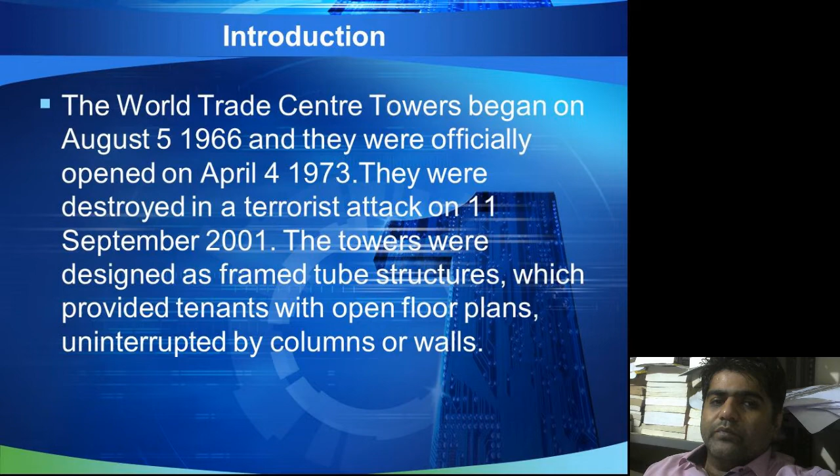The towers were designed as frame tube structures which provided tenants with open floor plans uninterrupted by columns or walls. This was accomplished using numerous close-spaced perimeter columns to provide much of the strength of the structures, along with gravity load shared with core columns. Above the seventh floor, there were 59 perimeter columns along each face of the building, and there were 47 heavier columns in the core.

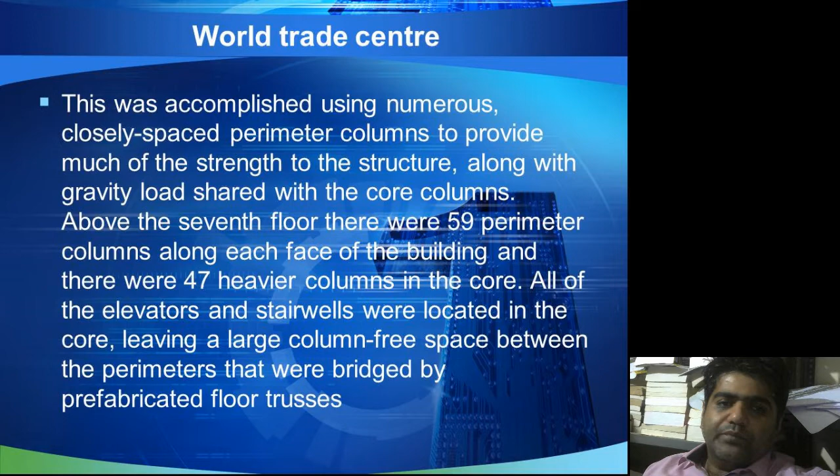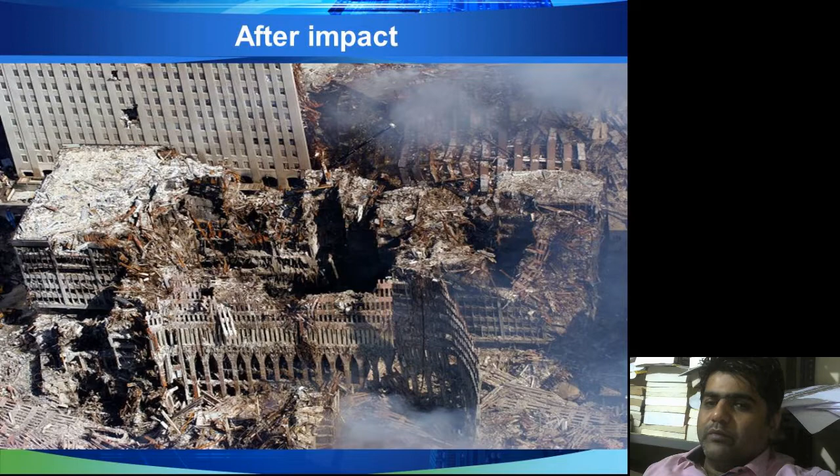I was wondering, so I researched and I found some news articles, and based upon those articles, I'm going to tell you what may be the cause. So, like all modern skyscrapers, WTC towers were designed to survive major fires. Fireproofing was also added after a fire in 1975 that spread to 6 floors before being extinguished.

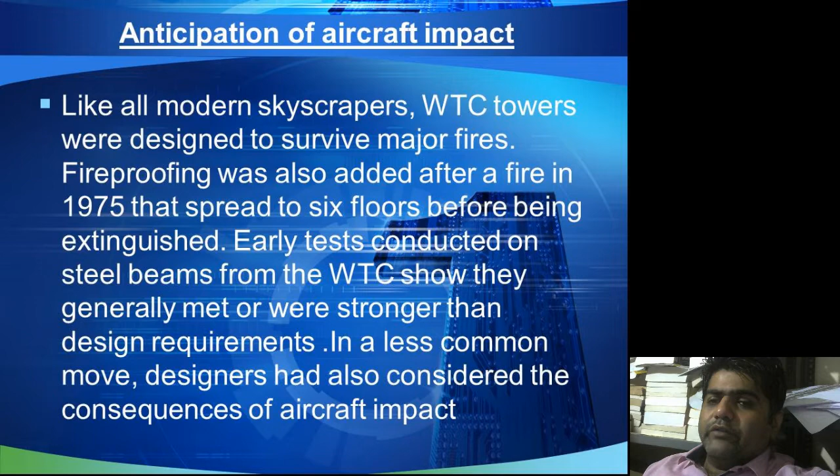Early tests conducted on steel beams from WTC show that they generally met or were stronger than the design requirements. In a less common move, designers had also considered the consequences of aircraft impact. But in 1993, John Skilling, who had been in charge of the structural design of the buildings, said that an aircraft impact would cause a great deal of damage and loss of life, mainly because of the ensuing fires, but the structure would not collapse.

After the 2001 attacks, Leslie Robertson, who had participated in the structural design of the towers, said that the towers had in fact been designed to withstand the impact of the largest airliner of the day, the Boeing 707-320, in the event one was lost in the fog while looking to land. According to Robertson, the aircraft weighed 2.63 lakh pounds with a flight speed of 180 mph, as in approach and landing, which would have been much slower than the actual impact of 9/11.

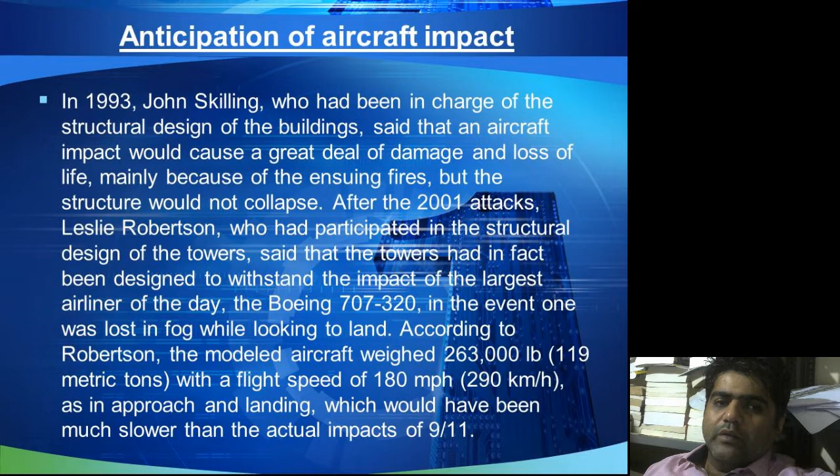The towers of the World Trade Center were designed to withstand the forces caused by the horizontal impact of a large commercial aircraft, but they did collapse. The reason, according to the papers I referred to, was the dynamic consequence of prolonged heating of steel columns to very high temperature. This heating lowered the yield strength of the steel and caused the buckling of columns of the frame structure along the perimeter of the tower and columns of the building core.

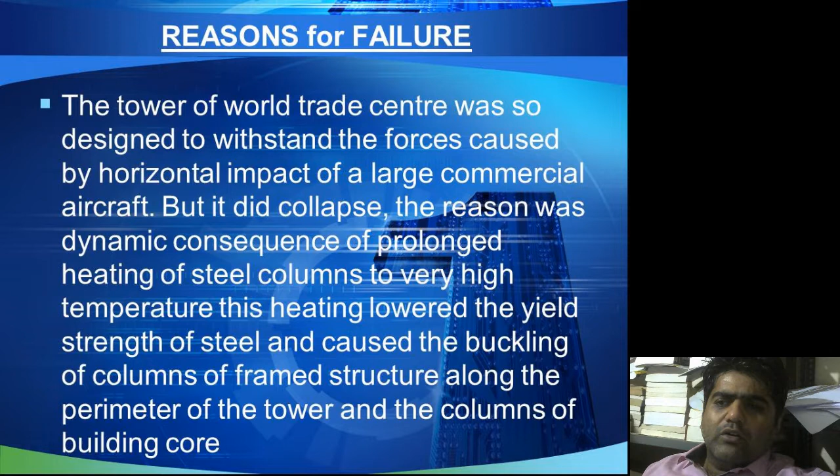So you can see here: 1, 2, 3, 4, 5. So the plane crashed at that one point, and what happened after the collapse? See it here. First when the plane hit, it heated up these columns. Once it heated up, the yield strength lowered.

So this becomes like an impact. So this whole weight is standing on very few columns, that is the inner core, 50 or so columns. Once this collapsed, it's just like a hammer going on that building. So subsequently it all went on collapsing. Maybe this is one of the possible explanations for the collapse.

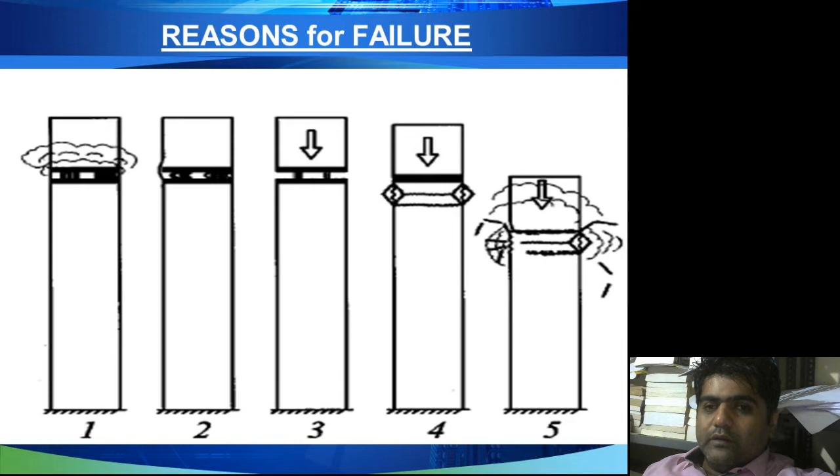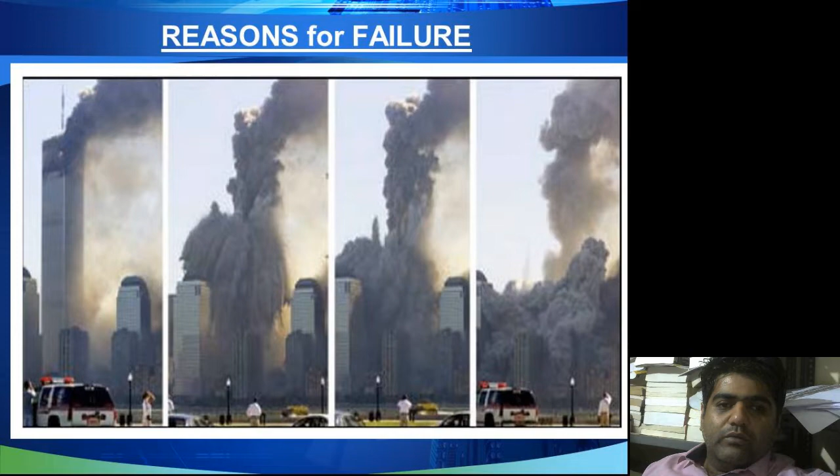So it can be validated based on the existing pictures also. So you can see how it collapsed. So stage one, there was a great fire caused by aircraft fuel spilled into the structure, which caused the steel columns to be exposed to a very high temperature of 800 degrees Celsius. The heating is accelerated by loss of protective thermal insulation due to the initial blast.

At such temperatures, structural steel suffers a decrease of yield strength and suffers a viscoplastic deformation. This leads to the creep buckling of the columns. Once more than half of the peripheral columns get cut due to this heat and this impact.

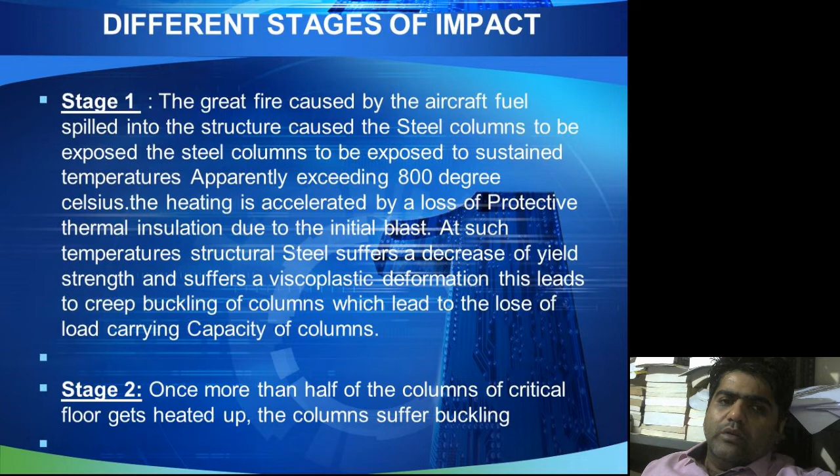The columns start buckling, due to which the weight of the upper part of the structure can no longer be supported, and so the upper part starts falling down on the lower part of the critical floor, gathering speed until it impacts the lower part.

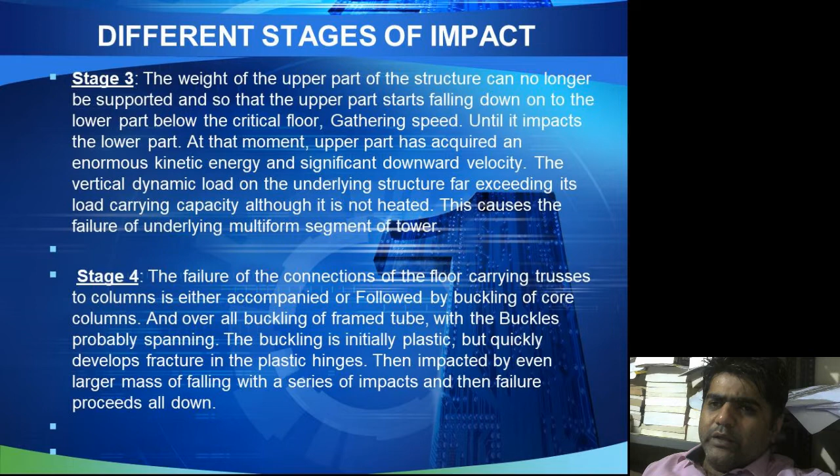At that moment, the upper part has acquired an enormous kinetic energy and significant downward velocity. The vertical dynamic load on the underlying structure far exceeds its load carrying capacity, although it is not heated. This causes the failure of the underlying multifloor segment of the tower. The failure of connections of floor carrying trusses to columns is either accompanied or followed by buckling of core columns and overall buckling of the frame tube.

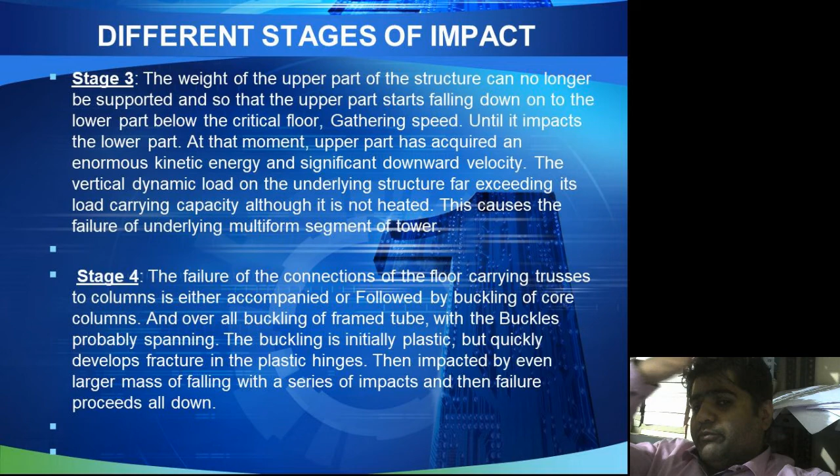With buckles probably spanning, the buckling is initially plastic but quickly develops fracture, and is then impacted by an even larger mass of falling, with a series of impacts, and then failure proceeds downwards. The details of the failure process after the decisive initial trigger that sets the upper part in motion are of course very complicated, and their clarification would require a lot of computer simulations.

For example, the upper part of one tower is tilting as it begins to fall. The distribution of impact forces along the underlying columns of the frame tube and core, and between the columns and the floor supporting trusses, is highly nonuniform, etc. However, a computer is not necessary to conclude that the collapse of the majority of columns of one floor must have caused the whole tower to collapse. This may be demonstrated by following elementary calculations in which simplifying assumptions most optimistic in regard to survival are made.

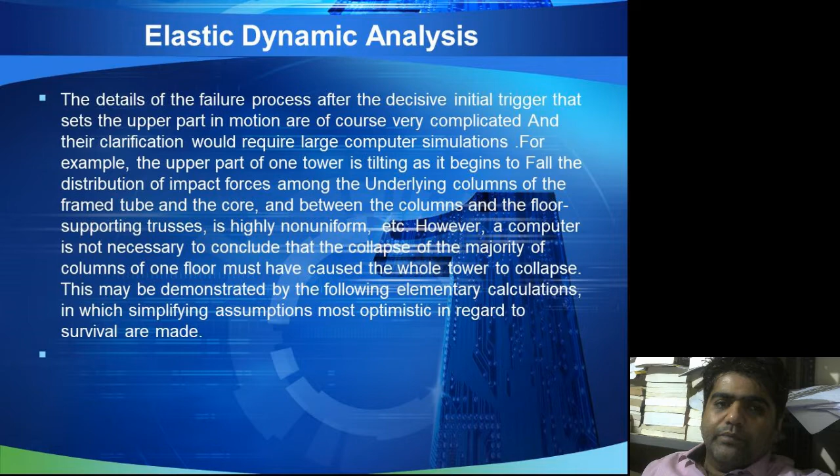So, for a short time after the vertical impact, after the elastic wave generated by the vertical impact has propagated to the ground, the lower part of the structure can be approximately considered to act as an elastic spring. Its stiffness C can vary greatly with distribution of the impact forces among the frame tube columns, between those columns and those in the core, and between the columns and the trusses supporting the floor slabs.

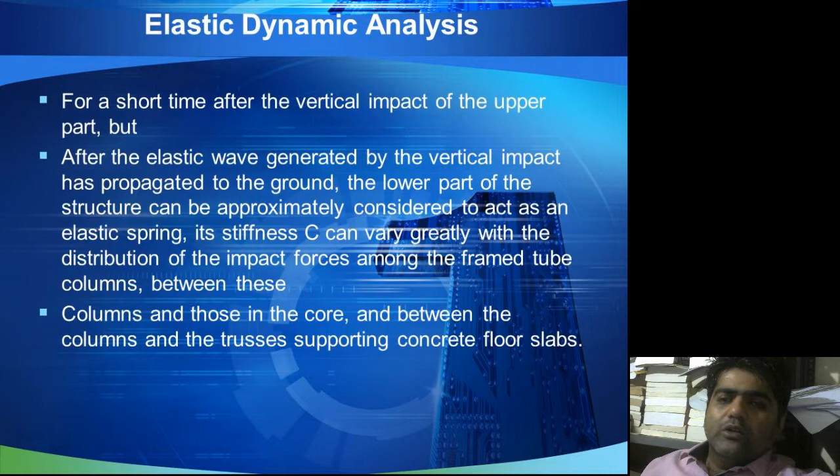For our purpose, we imagine that the impact forces go into the columns and are distributed among them uniformly. Unlikely though such distribution may be, it is nevertheless the most optimistic hypothesis to make because the resistance of the building to the impact is the highest. If the building is found to fail under uniform distribution of the impact, it would fail under any other distribution.

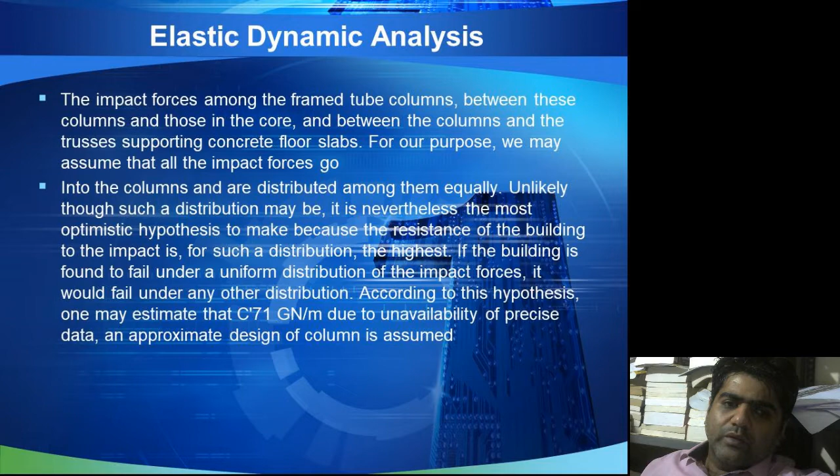According to the hypothesis, one may estimate C as 71 giganewton per meter, due to the unavailability of precise data, an approximate design of columns is assumed. So resistance during the initial drop of the upper part may be neglected. That is, the part may be assumed to move through distance h almost in free fall. The energy dissipated in the columns during the fall is at most 2 pi times the yield moment of columns times the number of columns, which is found to be only 12% of the gravitational potential energy released.

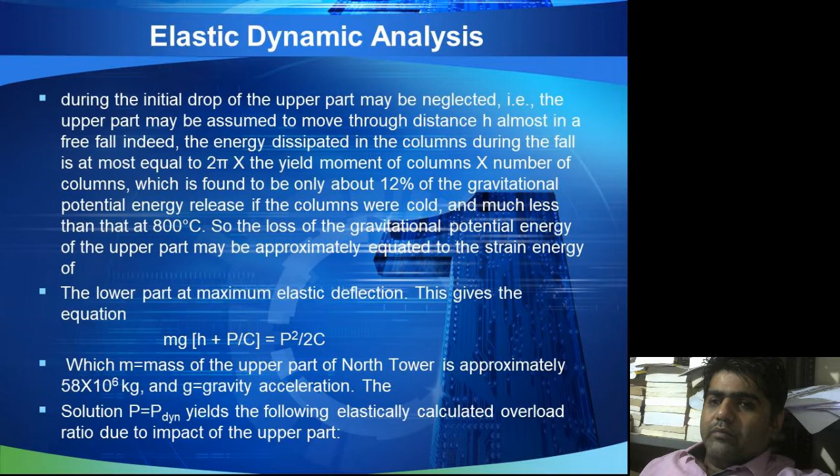If the columns are cold, and much less than that at 800 degrees, the loss of gravitational potential energy of the upper part may be approximately equated to the strain energy. So mg times h plus P by C equals P squared by 2C. M is the mass of the upper part of the north tower, approximately 58 times 10 raised to 6 kg. The solution P equals P dynamic. So P by P naught from that equation gives approximately 31 times the load bearing capacity. This is the second approximation of the load coming.

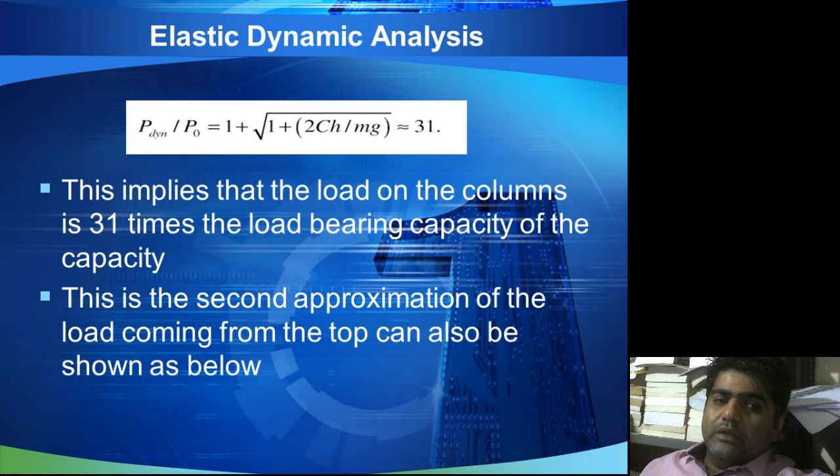So due to the sudden impact, you can see that the load coming on the building is 31 times the capacity. So you can see it validates the gravity driven collapse to be consistent with the observations. The present analysis further may prove alternative hypotheses of controlled demolition to be incorrect as per the papers. So this is the study. Thank you.

This was an old PPT we made during our BE presentation. So based upon the web data, the data above may not be reliable, but may give a rough idea of how the World Trade Center failed and may help future buildings to avoid such failure.

So now with Burj Khalifa and all, you can see that it is in the same type of cone. As the building goes higher and higher, you can see that the floors become smaller and smaller. So this is basically the learning that we have gained from it, in order to avoid gravity driven collapse and build much safer structures.